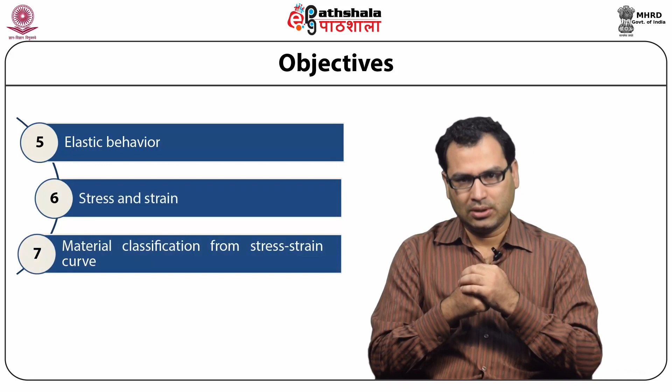Today in this module we are going to discuss material behavior including load, elasticity, rupture, etc. The topics covered are various ways of material classification, crystalline and amorphous materials, good and bad conductors of electricity and thermal energy, mechanical properties including elastic properties, various types of stress and strain, stress-strain relationships, and based on this relationship the classification of materials.

So what are the commonly known notions of material classification? The categorization of materials is a subject of personal choice, as it really depends on the property that is in mind for a specific application or need.

Secondly, the commonly used notions for material classification are crystallinity, electrical and thermal conductivity, mechanical strength, elasticity, optical reflectivity, or conductivity. And thirdly, since we are more concerned about the mechanical behavior of various materials which have direct relevance in biology, this will have major focus in this module.

Crystallinity: solids can be classified as crystalline or amorphous depending on the degree of crystallinity, that is the order in the arrangement of constituent atoms or molecules. For pure crystals, the degree can be considered as 1, and for amorphous solids, it is 0.

Examples of crystalline solids can be any metal, for example iron or magnesium, potassium nitrate, and so on. An example of amorphous solids can be glass, popularly known glass.

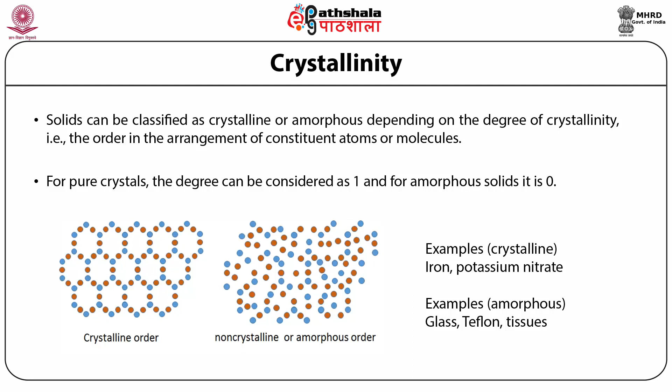In the other picture you have completely random arrangement of atoms or constituent molecules. They do not form a regular structure, they do not have unit cells which can be repeated over the entire material, and hence this is the non-crystalline or amorphous phase of the material. So materials can be found in these two forms, either crystalline or amorphous.

The second notion for material classification which is generally used is electrical conductivity. Materials are classified as electrical conductors, semiconductors, and insulators depending on their capability of transmitting electricity or the flow of charges.

Generally all conductors are metals, or all metals are conductors. Good conductors have very little resistance against the flow of charges, and hence they are used as electrical wires in your houses. Insulators are the least conducting, and semiconducting materials have intermediate conductivity between the metals and the insulators.

So as we said, all metals are conductors, good conductors of electricity. Some examples of semiconducting materials are silicon, germanium, and so on. And some examples from insulating materials can be glass, rubber, plastic, and so on.

Similarly, thermal conductivity is another way of material classification. Depending on the thermal conductivity, materials can be classified as conductors, good heat conductors, or bad heat conductors, or thermally insulating materials.

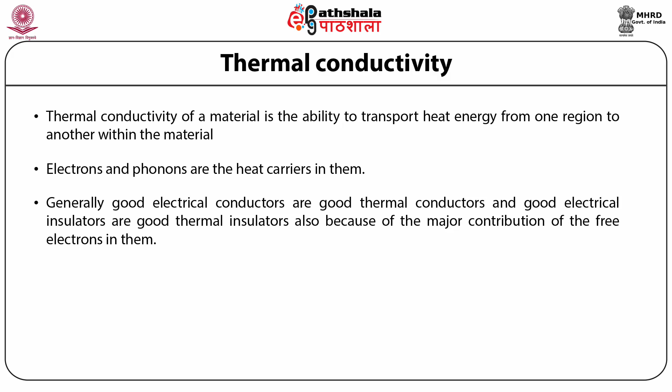Generally, good electrical conductors are good thermal conductors as well, or vice versa. As we said, metals are good electrical conductors and hence they are good thermal conductors as well, meaning they have very good or very high thermal conductivity. Examples of thermal insulators can be wood, plastic, rubber.

As an illustration to the transport of heat energy, we take a metal bar, one end of which is hot, meaning high thermal energy. The other end is cold, meaning low thermal energy. The direction of heat flow is always from the hot end to the cold end.

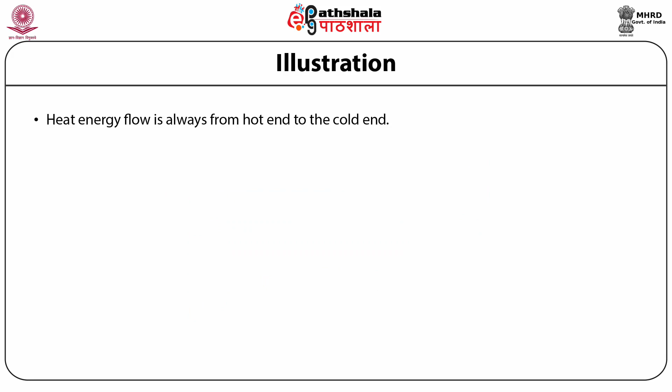This is in analogy with electrical conductivity or electrical transport through a metal bar. So in that case, you have one end kept at high potential and the other end kept at smaller potential. So the electrical current flows from the high potential end to the low potential end.

So transport of heat energy is due to either direct flow of the high energy heat carriers or by their collision with low energy heat carriers. This is the basic principle behind the transport of heat energy or electrical energy.

So it is due to the constituent electrons or phonons. Phonon is a quantum mechanical concept, referring to the vibrations of atoms or the constituent molecules of the solids. These are the main reasons for the transport of electrical or heat energy inside materials.

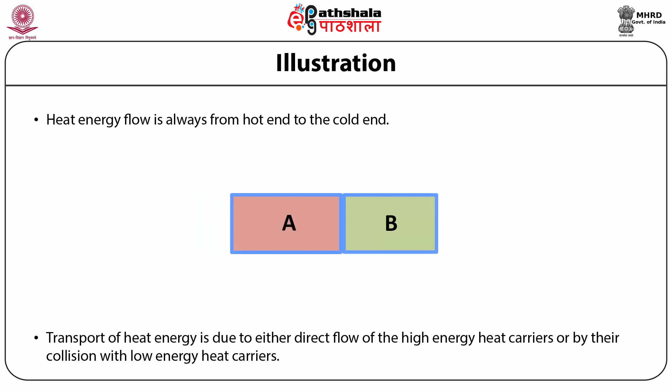So metals which have a higher number of electrons, and electrons are good carriers of heat and electrical energy, that is the reason why metals are good electrical and thermal conductors.

Mechanical properties of materials are intrinsic to each class of material, which determine how they will react to external forces. What are the properties of the materials that are in mind, which are described as mechanical properties? They could be the mechanical strength or toughness of any material.

Second, how the stress-strain relationship behaves. What is the Poisson ratio? How elastic the material is, meaning in terms of quantification of elasticity, what is the modulus of elasticity? And lastly, fracture strength.

So when you want to define force, stress or strain: deforming force is the external force that is applied on any solid for bringing about a change in its shape, form or size. That external force is called deforming force.

What is stress? The deforming forces cause an intrinsic stress in the material, because of the internal forces of the solid. This intrinsic stress is the definition of stress.

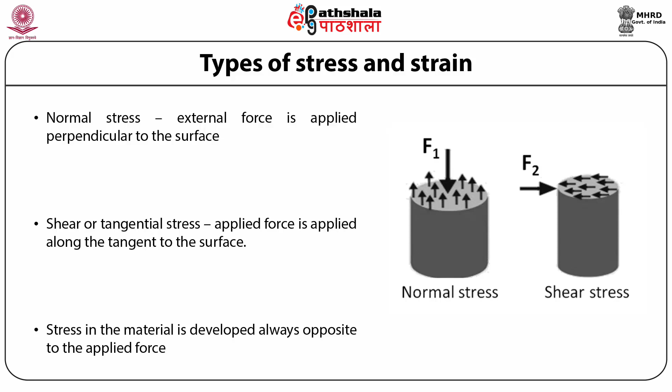Let's think of a block of gelatin having dimensions of 60 mm by 60 mm by 20 mm, without any external force. Now you apply a force of 2 Newton tangentially to the upper surface, which has dimensions of 60 mm by 60 mm. Because of this external force, you get a 5 mm displacement relative to the lower surface, which is fixed.

In this example, can you estimate the shearing stress produced in the block and the direction in which it gets produced, and how much it will vary from the top end to the bottom end when the bottom end is fixed? Can you plot that variation as a function of depth from the top end to the bottom end?

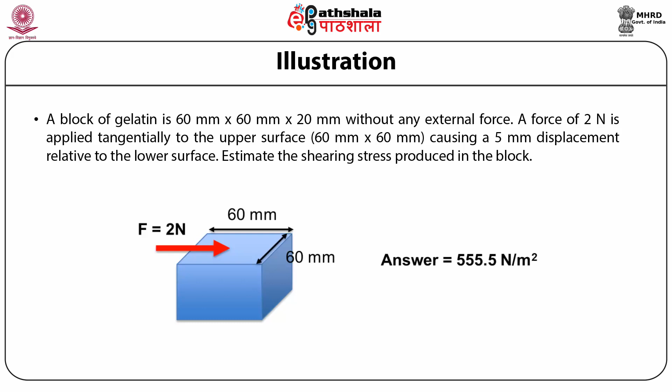At the top end, the stress that gets developed, which is the shear stress, is 555.5 Newton per meter square. So that should be your answer.

What is elasticity? Elasticity is the tendency with which solids oppose the external deformation forces applied on them. Highly elastic materials are those which return to their original shape immediately after the external forces are removed. Similarly, highly plastic materials are those which cannot return to their original shape and size at all, even after waiting for a long time after removing the external deformation forces.

In our daily life, elasticity is generally related to how much a body can be stretched by applying an external force. For instance, we say that rubber is more elastic than wax, because it can be stretched or pressed much more than wax.

In practice, no material is perfectly elastic or plastic. According to the physics definition, every material is plastic and every material is elastic. The difference lies only in the degree of elasticity. One example of a nearly perfect elastic material is quartz fibers, and one example of a nearly plastic material is paraffin wax.

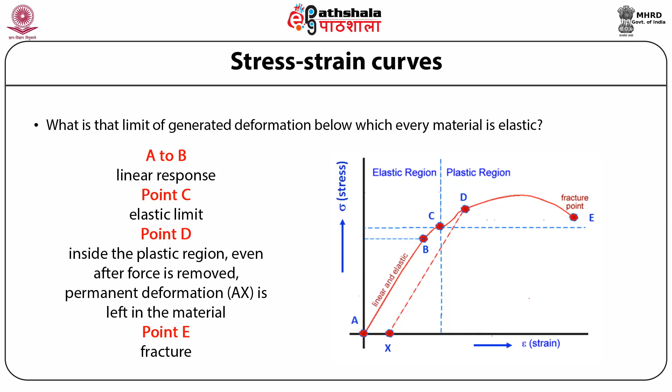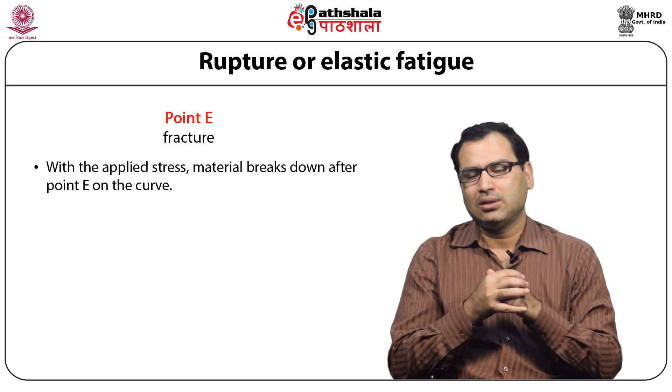This is called the point of fracture. What is fracture? With the applied stress, material breaks down after a certain external force is applied. Why does it happen? At the microscopic level, a great number of deformations take place, which can be, for example, as a result of breaking molecular bonds.

Here you have this stress-strain curve for a given material, which has been divided into three regions. The linear region, called the elastic region, where the developed strain is proportional to the applied stress or the stress in the material. The second region is the plastic region, where the developed strain does not linearly depend on the stress. And then you have an extreme point.

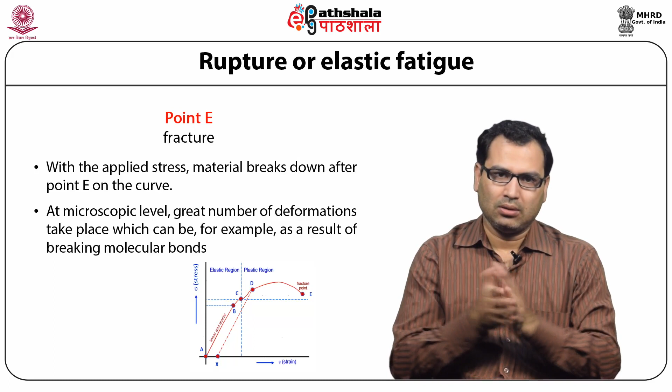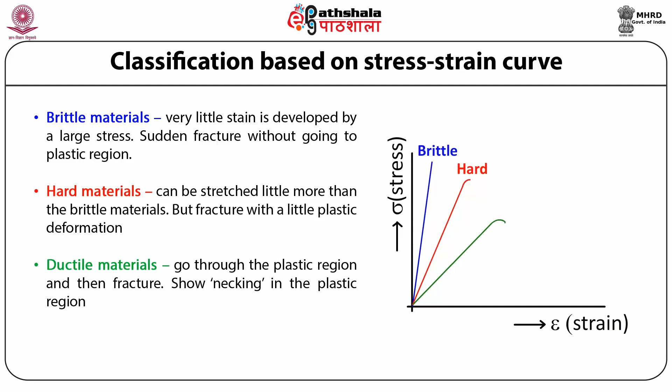In the second category you have hard materials, which can be stretched a little more than brittle materials, and the fracture occurs with a little plastic deformation. In the third category you have ductile materials, which go through the plastic region and then get fractured. These materials have a very peculiar behavior called necking in the plastic region.

Finally you have plastic materials, which have got a very tiny linear elastic region, and most of the time they remain plastic with respect to the applied stresses before they get fractured.

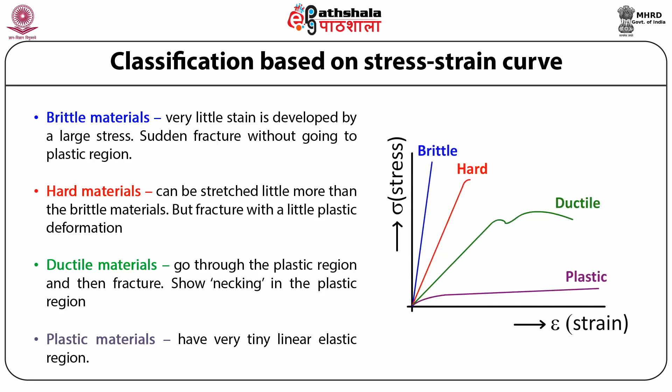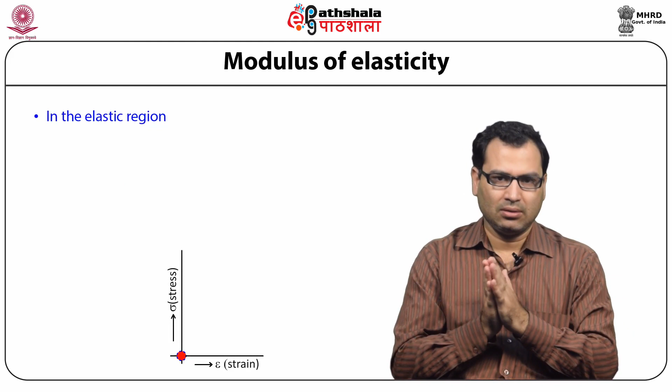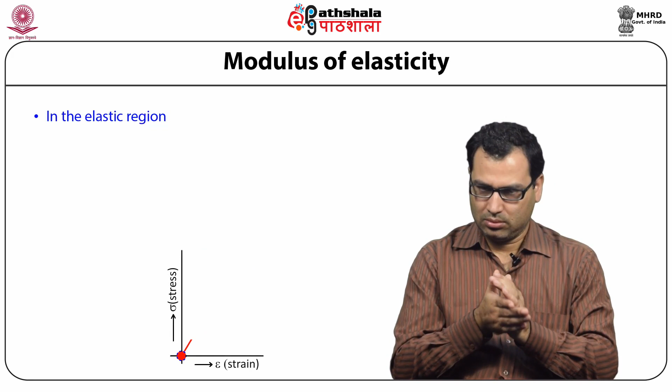As we just learned about the stress-strain curves of materials, in the elastic region, where the strain developed in the material is proportional to the applied stress or the stress generated in the material due to the applied external forces, this is basically described in terms of the modulus of elasticity, which is mathematically given as the expression E equals stress divided by strain.

So depending on the type of stress and strain, there can be Young's modulus of elasticity, bulk modulus of elasticity, and shear modulus of elasticity.

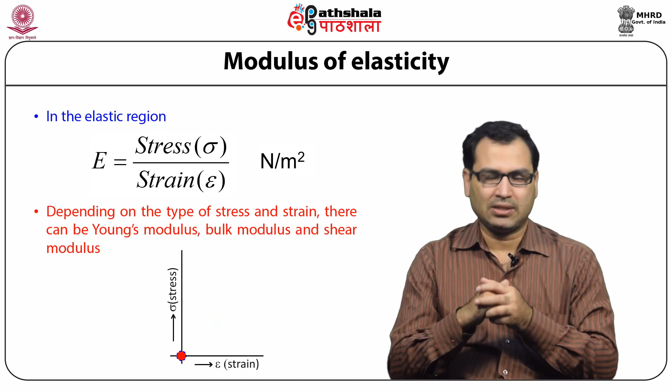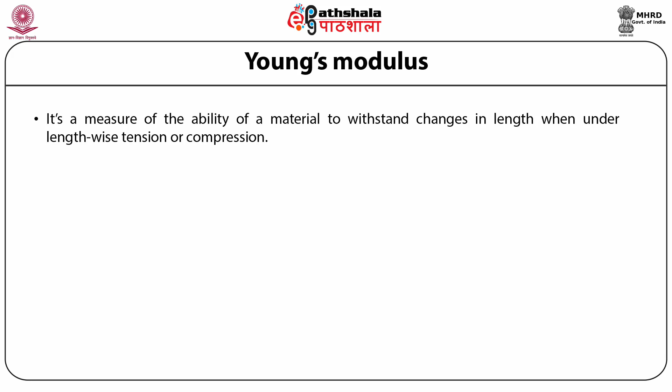Moduli of elasticity. In the first case, Young's modulus is the ability of a material to withstand changes in length when there is lengthwise tension or compression. Mathematically it is represented by the letter Y, which is the ratio between the longitudinal stress and the longitudinal strain. In the MKS system of units, it has the unit Newton per meter square.

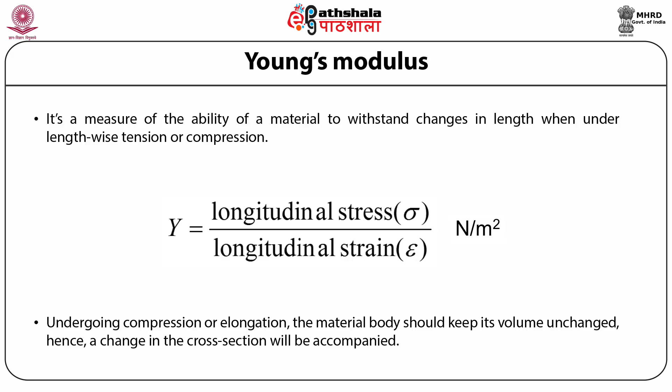So undergoing compression or elongation, the material body should keep its volume unchanged. That is the condition, and therefore a change in cross section will always be accompanied whenever a lengthwise stress or tension is applied. As an illustration of Young's modulus, consider a metal bar having cross-sectional area A that is pulled by a force F at each end.

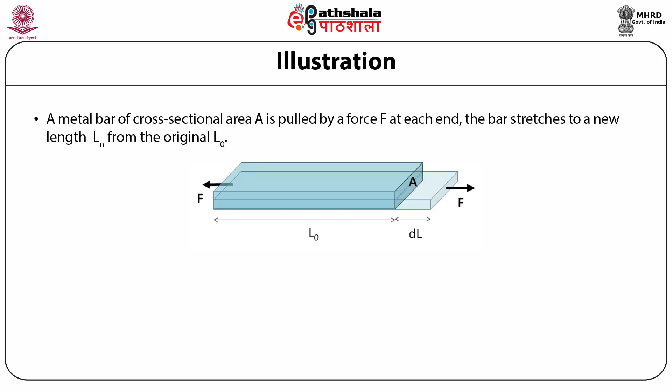So the bar stretches to a new length Ln from the original length L0. The question is, for this particular example, what would be the Young's modulus of elasticity? And that you can immediately see from the diagram: it is going to be the force times the original length, divided by the cross-sectional area times the change in length.

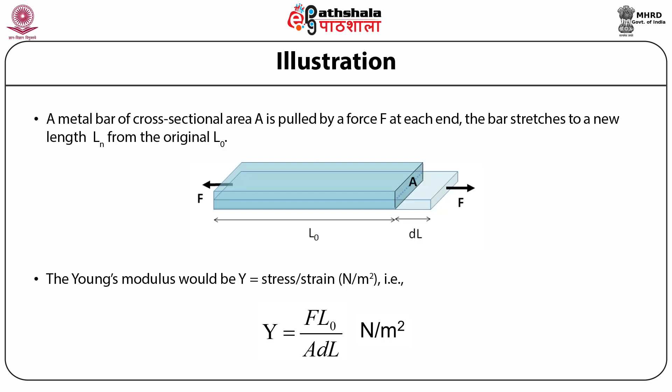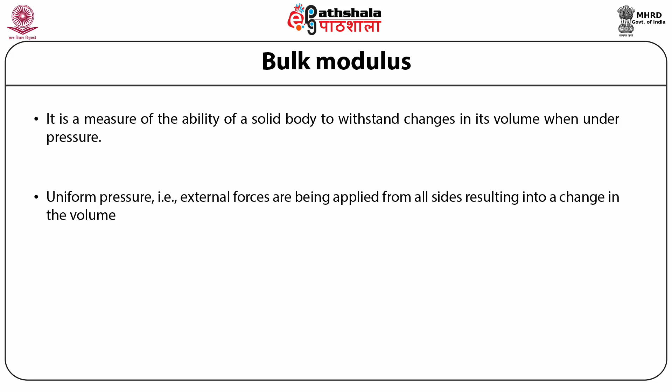Bulk modulus is a measure of the ability of a solid body to withstand changes in its volume when under pressure. So you apply uniform pressure from all around, that is, the external forces are being applied from all the sides of the body, and that results in a change in the volume of the body.

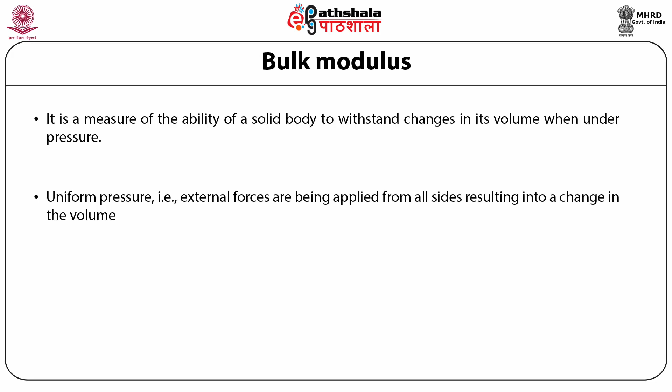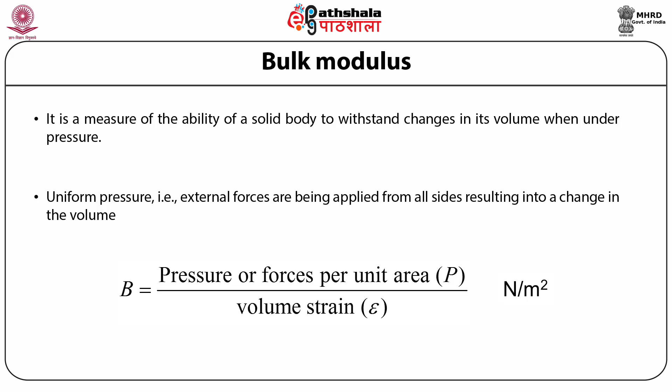In that case, the bulk modulus is defined as the pressure, or the force per unit area, that is required to generate a unit strain, a unit amount of volume strain. Keep in mind that all these moduli are expressed in Newton per meter square, which is the MKS unit of modulus.

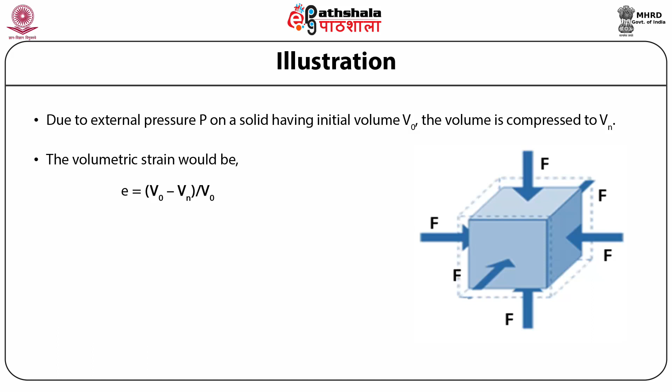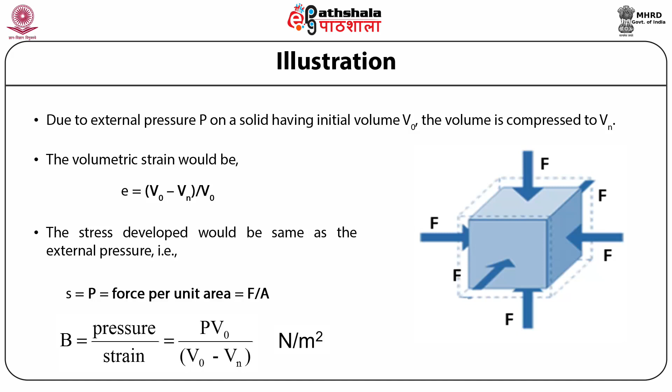Due to this external pressure P on the solid, which has an initial volume V0, it gets compressed to a new volume Vn. So the volumetric strain that develops in the body would simply be V0 minus Vn divided by the initial volume V0. In this example, the stress that develops would be the same as the external pressure P, and therefore the bulk modulus will simply be the pressure times the volume of the body divided by the change in volume, in Newton per meter square.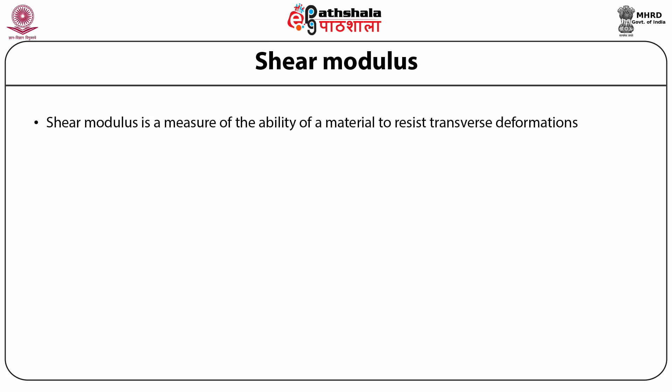Lastly, we have shear modulus, which is the ability of any material to resist transverse deformations. It is the ratio between the shear stress and the shear strain. In this illustration, you have a block where the external force is applied tangentially to the upper surface.

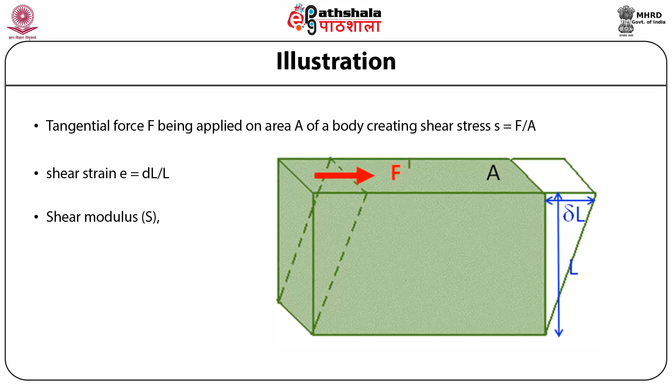That results in elongation of that surface to an extent of delta L, where L was the original length of the surface. So the shear stress in this example would simply be the force divided by the area of that surface. The strain is delta L divided by the original length L, and therefore the shear modulus will be the force times the original length divided by the area of the surface on which the force was applied, divided by the change in the length of that surface from the fixed surface.

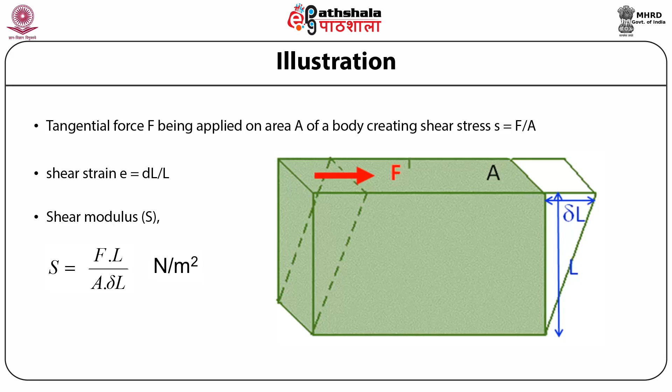There is an important quantity used to characterize materials, and that is Poisson's ratio. When a solid is pulled or compressed along its longer dimension, there is a tensile or compressional stress that gets developed in it. So Poisson's ratio is defined as the ratio between the strains developed along the lateral direction, that is parallel to the stress, and that perpendicular to it.

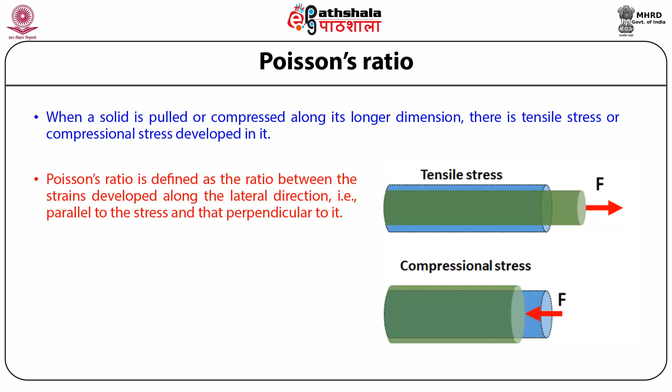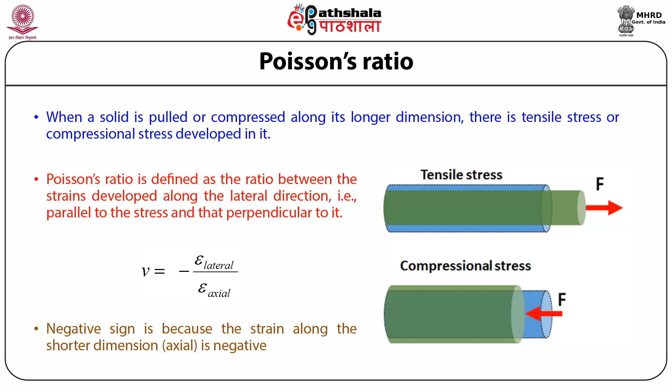If we use the parameter nu to represent Poisson's ratio, then it is given as minus the lateral strain divided by the axial strain, where the negative sign is because the strain along the shorter dimension, which is the axial dimension, is opposite to the lateral strain, as explained in this figure.

For elastic materials, now we would like to understand what Hooke's law is. In the case of a spring force, we know that for a spring fixed at one end, if it gets pulled, compressed, or pushed with some force F, then the spring force which develops in the spring is first of all opposite to the applied force or the direction of the change in the length of the spring.

Secondly, it is proportional to the change in the length of the spring. So for every elastic body, Hooke's law says that if you compress or pull the body, there develops a spring force Fs, which is opposite to the change in the size of the elastic body, times the spring constant or elastic constant of the body. This is the same as the spring law, popularly known as Hooke's law, but true for every elastic body. Here the spring constant K is a measure of the stiffness or softness of the elastic body on which external elastic forces are applied.

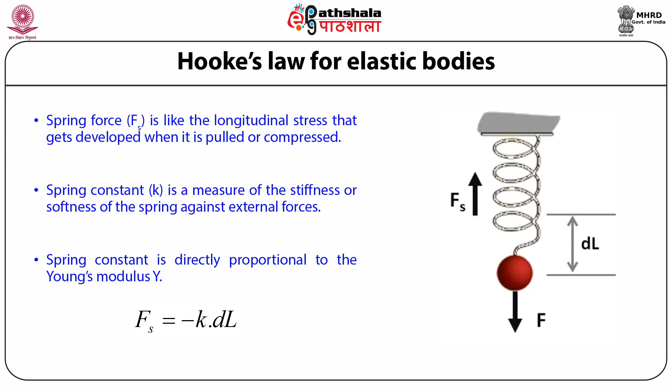Higher the stiffness, higher would be the spring constant. So here are two practice problems which I would like you to try yourselves quickly based on the understanding we have just got from this module. The first problem: a thick uniform rubber rope is considered which has a density of 1.5 gram per centimeter cube, and the Young's modulus for this rope is 5 into 10 to the power 6 Newton per meter square.

The original length of the rope is 8 meters. When this rope is hung from the ceiling of a room, you have to find out what would be the change in the length of the rope due to the weight of the rope itself. If you do it correctly, the correct answer would be 0.19 meter.

In the second practice problem, your leg bones are considered. Typically, they have a cross-sectional area of about 9.50 centimeters square. If they experience a force of about 855 Newton while you walk, find the fractional amount, or the longitudinal strain, your leg bones are compressed by walking. For this problem, you can use the Young's modulus of the bone as Y equals 10 to the power 10 Newton per meter square.

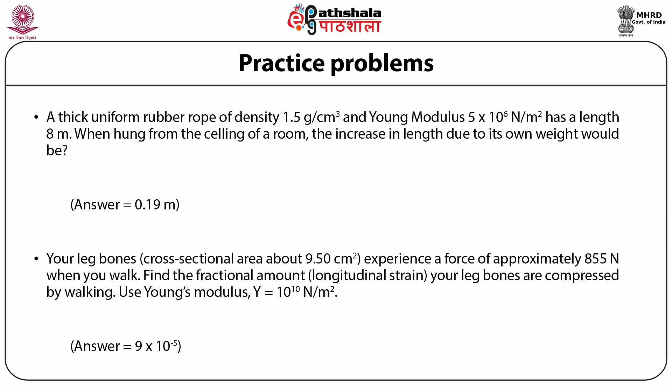If you solve this problem in the same manner as you did for the first one, the correct answer would be 9 into 10 to the power minus 5. That is the strain you will develop while you walk in your bone. You can see that strain is a dimensionless parameter, which is a ratio between two lengths in this particular example, or can be between a quantity and the change in that quantity. So strain is always unitless.

To summarize the module, we got familiarized with some of the most basic properties of materials that are used to classify them. Knowledge of these basic properties of solids or materials is very essential, for they dictate the schemes to be followed while designing new materials or tools based on them for various needs and applications. In the medical field also, it is very important for designers of artificial organs or body parts to choose the right material which behaves or has properties according to the needs.

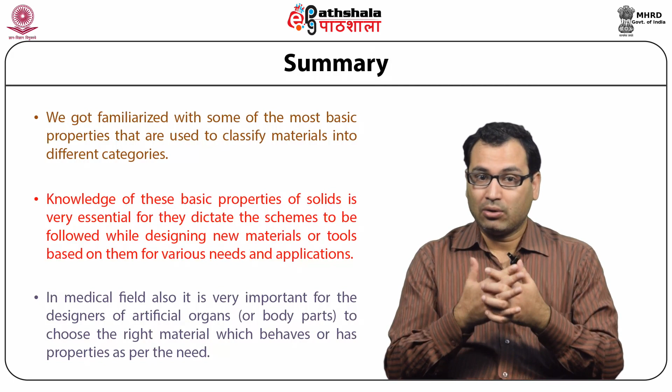We discussed the elastic and plastic behavior of solids and learned how different materials behave differently under stress. By looking at the stress-strain curve of a particular material, one can easily find out if that material is brittle, ductile, or plastic. Thank you.